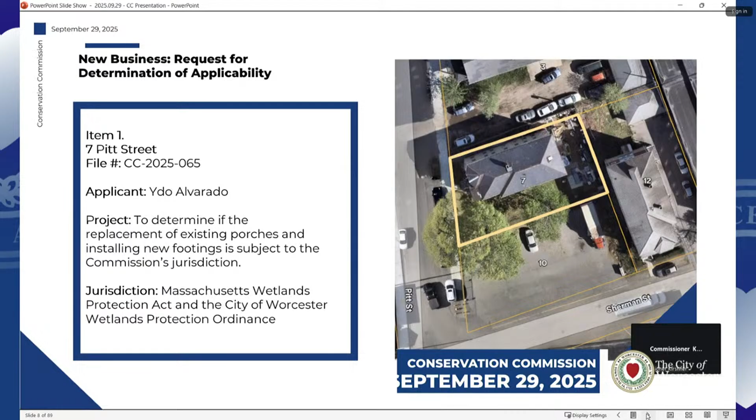Okay, can you tell us about what you're planning to do? So my dad's going to rebuild the 3 porches. We already got the approval because it's, I guess, historical. We already did that, but now this is for the foundation. I guess it's in a flood zone area. Yep, we already did the paperwork and everything. They just told us to come here.

Okay, thank you. Staff, any comments or concerns about the project? Yep, so essentially this project is within bordering land subject to flooding, so they were required to file with us. They have confirmed that the porches are going to be constructed in the same footprint as they currently are, and that there would be no loss of flood storage capacity for the site, so no current concerns from staff at this time. Commissioners, questions, concerns with the project?

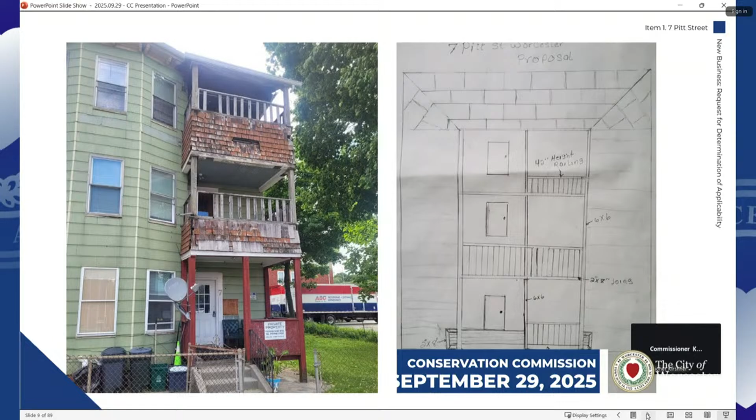Does he need some type of permit or anything for him to start? Yep, so staff will be issuing a determination of applicability form in the next week or so.

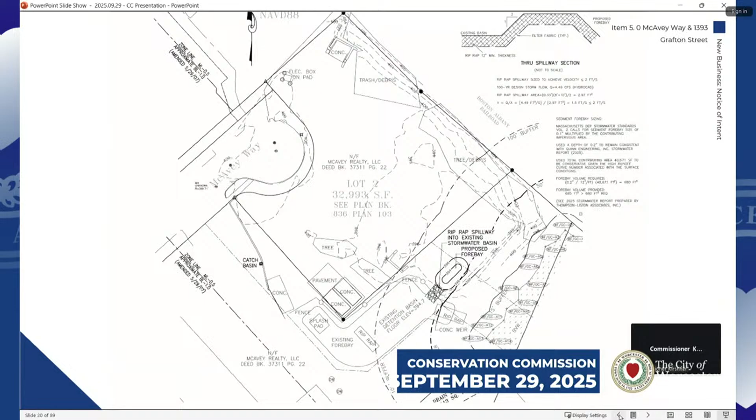Do we want to recircle back to Bridle Path? Anyone online, let's try that.

Hi there, can you hear? Yes, can you hear me? It's Josh. Sorry, I had called my phone just to make sure that I could get through, and that was the reason for the echo. Are you still able to hear me? Yes, we can hear you. Hi there, are you able to hear me? Yes, we can hear you, go ahead. Okay, I apologize. FYI, I'm not sure why this happened, but everything is by default muted, and my computer was overridden - even though I appeared unmuted on Zoom, my microphone was still muted on my computer. So I had to figure that out. I do apologize.

My name is Joshua Surratt. I'm here from Epsilon Associates on behalf of Massachusetts Electric Company for the request for determination of applicability for the utility maintenance project near 309 Bridle Path. Before I get into the details, would you like me to share my screen and pull up the figures? Okay, here we go, perfect.

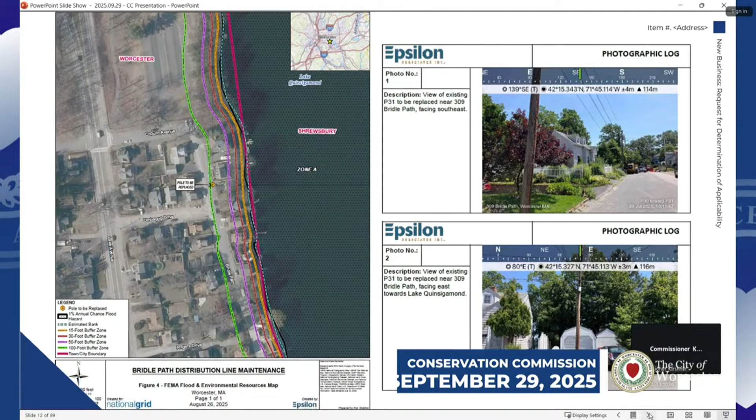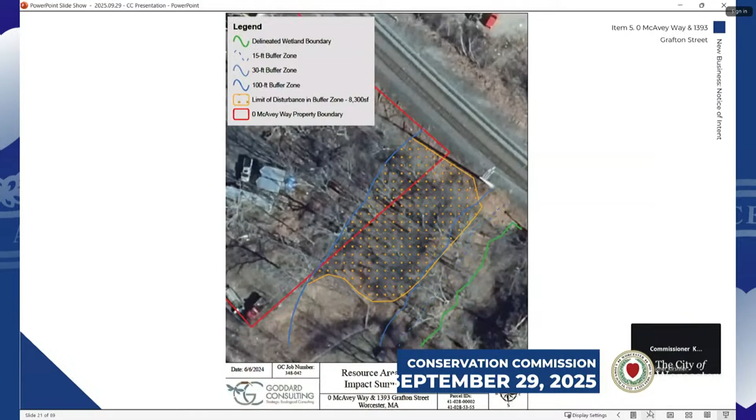Next up, number 7, new business notice of intent, 1A Corrine Street.

Evening, Madam Chair, members of the Commission. My name is Nate Boutz with Land Design Collaborative. I'm here on behalf of ML Realty Group LLC, who's joined me today, Andy and Helios. We are respectfully submitting this notice of intent for work within the 100-foot stormwater protection zone. This is a single-family residential development at 1A Corrine Street. The site is located in the RL7 zoning district, a corner lot with frontage on Corrine Street and Grafton Street. No wetlands are situated on the site, and the site contains about a quarter acre of undeveloped area. The site does have steep topography ranging in slopes between 5 to 60%.

The reason why we're submitting here today is for work within the 100-foot stormwater protection zone with catch basins located within Corrine Street and also Grafton Street. The exhibit here shows the stormwater protection zone buffers outlined in blue for your readability. The proposed project is the construction of a single-family residential dwelling situated in the southern portion of the parcel. Associated work will include paved driveway, utilities, boulder walls, and lawn landscape areas.

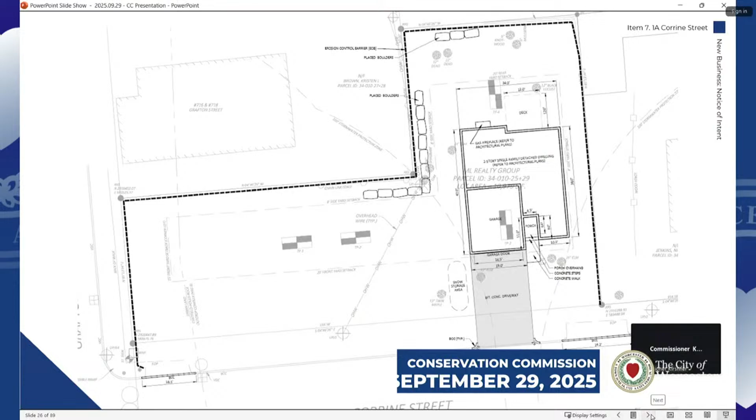Temporary work within the stormwater protection zone includes site preparation and other construction activities such as earthwork, utility trenching, installation of sediment control measures. Silt sacks will be installed within the catch basins located downstream of the proposed development. Permanent impacts in the stormwater protection zone include the paved driveway and proposed loam and seeded lawn areas. Stormwater attenuation will be collected via rain barrels at downspout locations from the roof gutters.

Additionally, staff comments were received on September 24th, which were addressed and included in this plan set. The project is still subject to site plan review due to the steep slopes, so we will be meeting with Planning Board this Wednesday. And with that, any questions from the Commission?

Staff had relatively minor comments related to extended erosion controls, native plantings, and measures be provided for groundwater recharge. Most of these comments have been addressed with revised plans, so they will be providing a rain barrel to collect some of the runoff from the roof, and they have provided a landscape plan with some native shrubs and trees as well. So staff doesn't have any concerns with this project at this time.

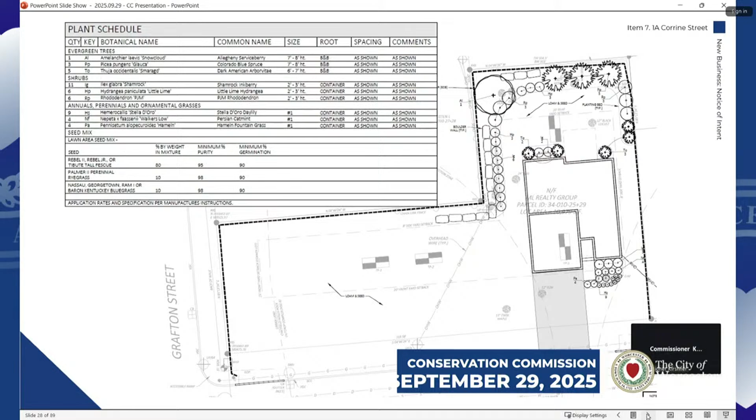And the construction entrance for this project is actually closer to the storm drains. Correct, yes. What was the reason for placing it there? One of the comments received by staff was about the construction entrance. So the thought process behind putting the construction entrance there...

So you can kind of see it's a little gray, but the topography, the steep parts, is kind of all up in the southern portion of the lot. So that's the flattest area, most easy for access for construction vehicles. And there are 2 existing curb cuts, paved curb driveway aprons, which will be removed, loamed and seeded, and curbing installed.

And the thought process was to utilize one of those already existing paved aprons as part of the construction entrance. Construction vehicles enter through the flat topography of the site to get to their earthwork, and then that area is loamed and seeded.

So project completion - is the construction entrance downslope of the storm drains? Yes, down, below grade. The street flows down towards Grafton Street. So yes, the construction entrance is actually below where the storm drains are.

So do we have storm drains that we need to be concerned about? The one in Grafton Street? Yeah, I would say the one in Grafton Street that's currently boxed with a silt sack. And then the other ones also have silt sacks within them for the proposed earthwork associated with the house.

I assume most of the traffic's coming in from and out to Grafton Street, not further in. And then the erosion controls you'd requested for the entire perimeter, including down there.

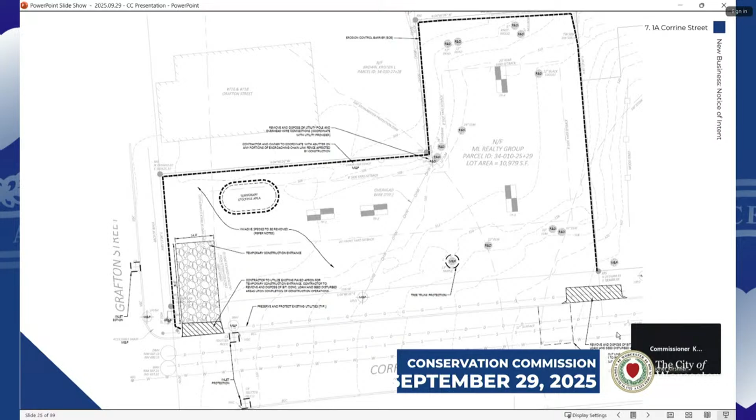All right, next up, number 8, new business, notice of intent, 555 Plantation Street.

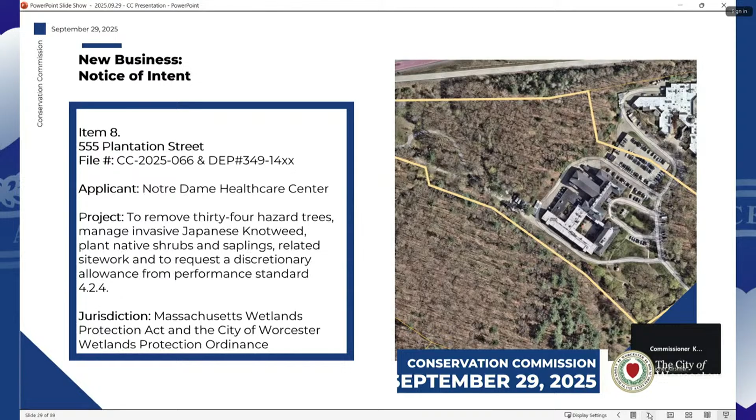Good evening. Arthur Allen from Ecotech Incorporated, project wetland scientist. With me tonight is Andrew Dubé, grounds superintendent. He's been my contact for Notre Dame Healthcare at this project site. Again, this is 555 Plantation Street, the existing Notre Dame Healthcare facility. I was contacted because they have an issue along the south side of the site, primarily on the south bank of Coal Mine Brook, which forms that southerly boundary.

The brook has been badly undermined, undercut the banks, and there's a number of large trees on that bank. At least 4 of them have fallen. One recently took down the main power feed that runs along the driveway between the brook and the existing healthcare facility. Some of the trees are large enough to actually hit the healthcare facility if they fell. So basically the brook's being undermined on the south bank, and the trees' roots are exposed and they're falling across the brook.

Andrew's worked with a tree company, and they've recommended 28 live trees, plus there's 4 standing dead trees and 2 trees currently down across the brook. The 2 that are down have debris dams formed on them, which is actually impeding the flow in the stream. So the project, as currently proposed, would be to take down all of those 34 standing, live, dead, and fallen trees, plus the 2 debris dams that are in the stream.

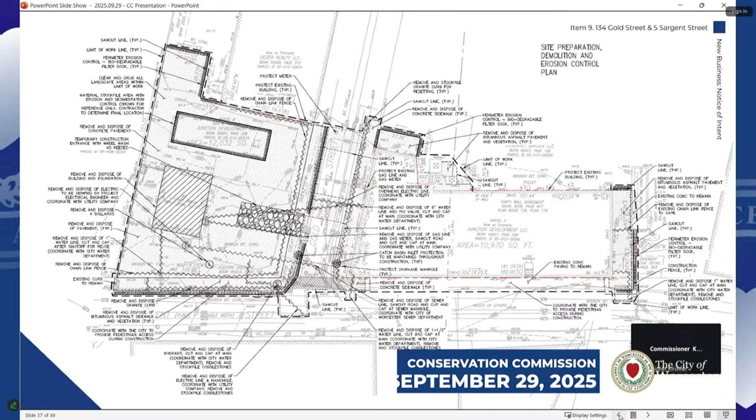That's been submitted to your staff as late as today. We are still awaiting the DEP file number, so I understand this would be continued. But in general, the project would do mainly exterior and interior renovations of the site at 134 Gold Street. The parking at 5 Sargent Street would have 2 catch basins along with a water quality unit.

This is a unique project in that there isn't a surface water resource in the area. The BLSF floodplain boundary appears to be from a culverted stream that runs somewhere underneath the property, a legacy of city development years ago. So we've accommodated the site grading to provide compensatory storage incrementally, foot per foot, up to the 450.4 elevation, such that we'll have an excess of flood storage capacity after the site is developed.

Through the course of construction there'll be inlet protections for the existing catch basins. There'll be perimeter erosion controls around the site, street sweeping, and such to ensure that sediment doesn't enter the stormwater management system. And with that, I'll hand it over to the commission.

Comments? We haven't done a deep dive on the review of the plan revisions yet, so we'll do that and issue comments in the next week or so. We did take a quick look at the compensatory storage calculations, and everything looks like it's probably going to meet performance standards for BLSF. Just a couple questions for the applicant while we have you here.

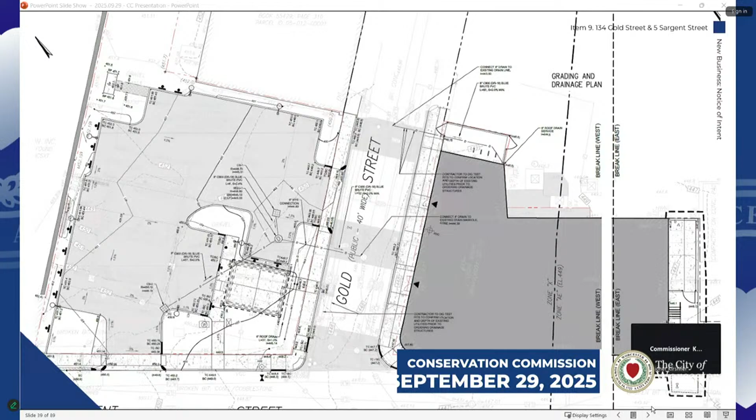All right, so that's it for hearings. Next up, requests for certificate of compliance, 29 East Mountain Street.

In 2020, an order of conditions was issued for construction of 3 low-rise apartment buildings. The work was never completed. They cleared or prepared some of the site and installed erosion controls, but never completed the work. The site has been allowed to revegetate.

The erosion controls were removed this past week. The applicant is looking to have the order of conditions removed from the title of the property, so they're seeking a certificate of compliance issued for an invalid order of conditions. The order of conditions is due to expire in October. Staff has no concerns with issuing a certificate of compliance.

Motion to issue the certificate of compliance. Second. Commissioner Canton? Aye. Commissioner Kirschner? Aye. Commissioner Bertoni, aye. Next up, Aurora Street.

In 2023, an order of conditions was issued for construction of a single-family home within the buffer zone to a BVW. The work involved installing permanent markers, which has been done. An as-built plan has been provided, along with a letter from a professional engineer. Staff conducted a site visit on September 22nd and confirmed the permanent markers are installed.

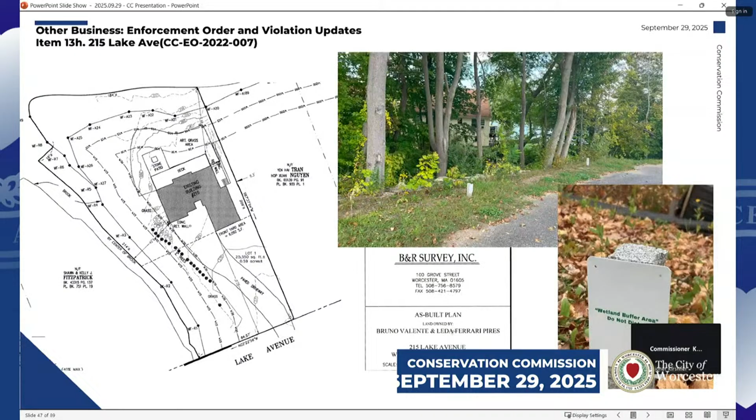But we didn't do that for 215. At this point, now that the plantings have been installed and we have conditions for monitoring in the order of conditions for 215, we'd recommend lifting the enforcement order for 215 and letting the second year of monitoring next year proceed under the order of conditions for that site.

So moved. Second. Commissioner Kenton? Aye. Commissioner Kirchner? Aye. Commissioner Fatoni? Aye.

All right, one more update for you. So we have 13W, which is 620 Grove Street. You guys may remember this from earlier this spring.

Essentially, work was conducted on the property without a permit, within the 15-foot buffer of Delaney Brook. They were looking to remove an old pool structure that had been buried on the property, so they came before the commission. The commission requested they file a request for determination of applicability, and a determination of applicability was issued to allow them to remove the pool structure.

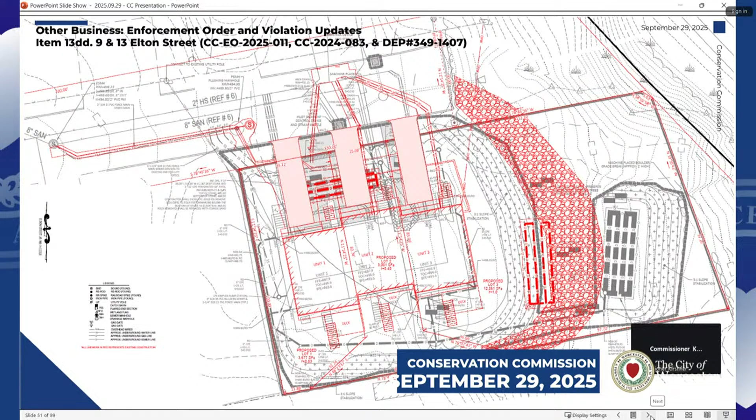What you can see on the screen here is a red-lined overlay of existing conditions, with the exception of the driveways, which are not currently installed, over the approved plan. That red shaded area, the band just east of that grading, is a riprap slope. That riprap slope was not permitted, and that area was outside of the approved limit of work. As you get closer to the wetland boundary, it's within the 30 to 15 and then partially within the wetland.

The erosion controls were a complete mess. The street was covered in sediment, catch basins were full of sediment, and there was construction debris in the channel just down gradient of the outfall. So obviously this was an instant enforcement order issuance.

We required that work stop on site. We required that a wetland scientist provide a report detailing the impacts and proposed remediation. We also required that an amended order of conditions be sought for any proposed changes to the approved plan. So if they are going to propose new grading in that area that's outside of what was previously approved, that needs to come back in the form of a revised plan and amendment request. But obviously the main issue at the moment is just getting the erosion controls installed, getting that street cleaned up, and then getting the debris out of that wetland as well.

So we set a deadline for them to appear at the next meeting to discuss this. We've been in contact with their wetland scientist. I think he was getting out there today to take a look at this, but he was going to provide a report in terms of getting the remediation going, but obviously not great.

So tonight we're just looking for a ratification. Happy to answer any questions the commission has. If there's anything burning that you'd want to see required, we can also add that to the existing enforcement order.